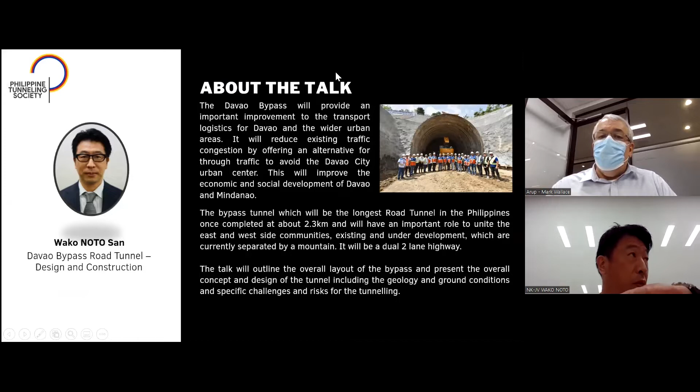Stop sharing. You share your screen. Okay. Is it okay? No, it's fine.

Thank you for your introduction and for giving this occasion to introduce the Davao City Bypass construction project. I would like to introduce the Davao City Bypass construction project.

Project description: Davao City Bypass is one of the projects in the Build Build Build program in the Philippines. It aims for improvement of the transport, logistics, and mitigation of congestion in Davao City urban center, to contribute to the economic and social development of Mindanao.

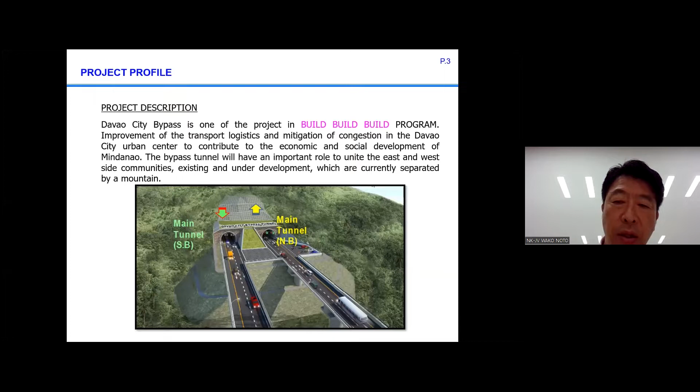The bypass tunnel will have an important role to unite the east and west side communities, existing and under development, which are currently separated by a mountain.

Project objective: hasten interregional transport of goods and services passing through Davao City, reduce transport cost of products to customers, and mitigate congestion in the urban center of Davao City, where average travel speed is less than 20 km per hour. As a result, exhaust gas is also reduced.

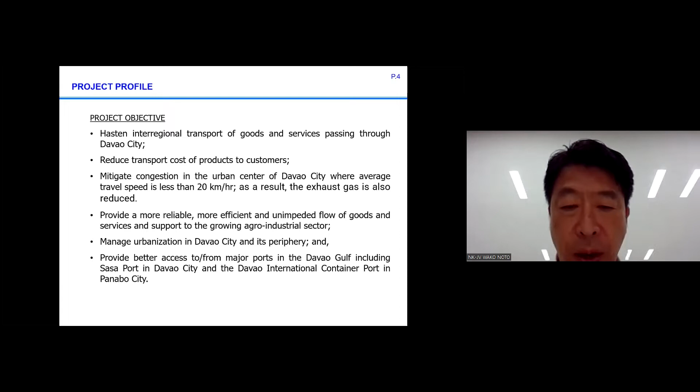Provide a more reliable, more efficient, and unimpeded flow of goods and services, and support the growing agro-industrial sector. Manage urbanization in Davao City and its periphery, and provide better access to major ports in the Davao Gulf, including Sasa Port in Davao City and the Davao International Container Port in Panabo City.

Background: the Japan International Cooperation Agency conducted a preparatory survey of the Southern Mindanao Economic Corridor Improvement, Davao City Bypass Construction Project, in 2013 to 2015.

The project implementing agency is the Department of Public Works and Highways, and the implementation office is Road Management Cluster 1 of the Unified Project Management Office. Consultant services for detailed design and tender assistance have been conducted.

This ran from February 2017 to December 2020. Capacity development of DPWH staff for tunnel operation and maintenance, and tender document preparation for the company of the Davao City Bypass Tunnel, started March 2022.

Construction supervision package 1-1 started 21st December 2020. Additionally, the contractor for construction of package 1-1 is the Shimizu, UBI, and Takenaka joint venture.

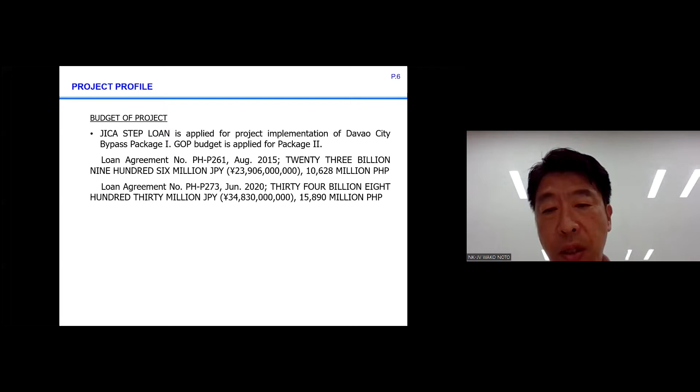This is similar to 10,628 million pesos. Loan agreement number PH-P273, June 2020, for 34,830,000,000 Japanese yen, similar to 15,890 million Philippine pesos. This is the location map of Davao City Bypass.

This is the beginning point, the south point of Maharlika Highway. This is Maharlika Highway, one of the main roads in Davao.

This blue color is the package 1 section. The red color route is the package 2 section. This is Sasa Port, and this is Samal Island near Davao. This is Davao Airport. The end point is almost the borderline of Davao City and Panabo City.

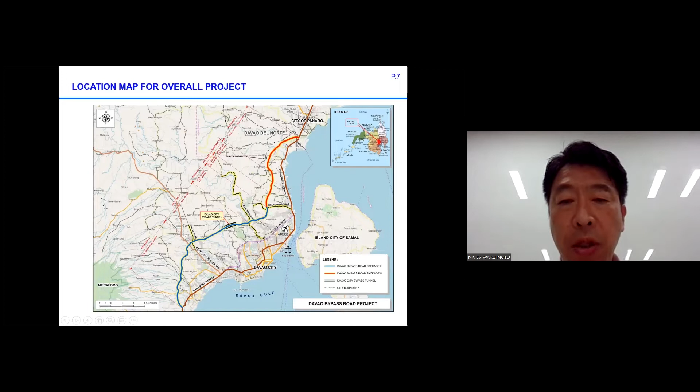This is Maharlika Highway. Blue route is Davao Bypass. So Davao Bypass is bypass for Maharlika Highway.

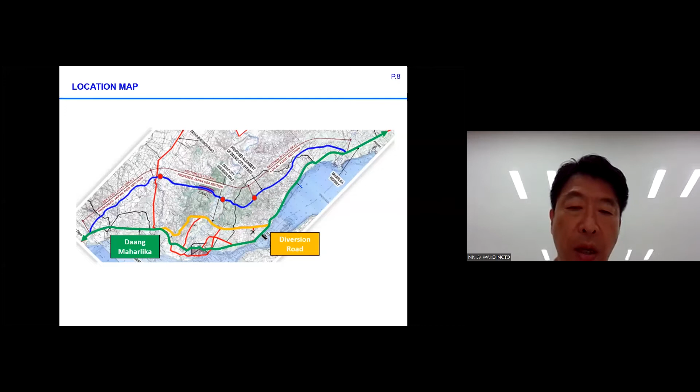This diversion road, now mainly using diversion road as Maharlika Highway. This is Davao Bukidnon Road. This road is north-south road, north-south regional road in Davao.

This section is package 1-1. This section is under construction. Length is 10.7 kilometers.

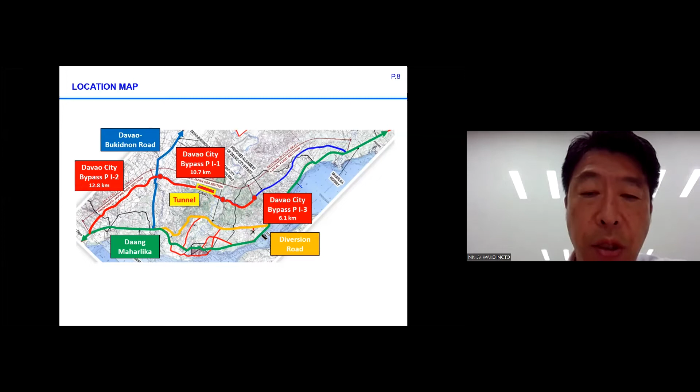This is the tunnel section. This is package 1-2, length is 12.8 kilometers. Now we are conducting the procurement for contractor. Also, package 1-3 length is 6.1 kilometers. This package also under procurement, under bidding. This is package 2, length is 15.6 kilometers.

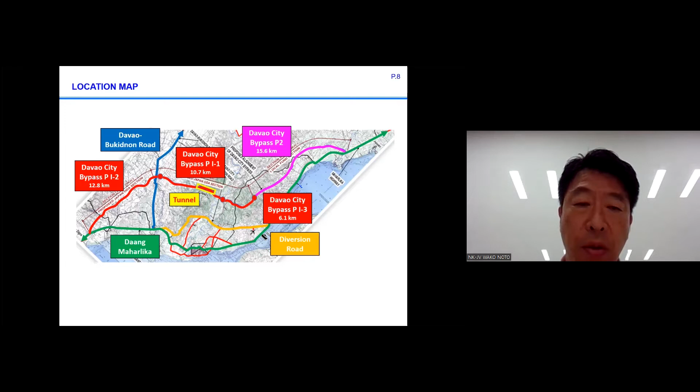So the tunnel is included in package 1-1, length is about 2.3 kilometers. And this tunnel will be the longest road tunnel in the Philippines now.

So package 1-1 total length is 10.7 kilometers. 7.9 kilometer is the road section, 0.5 kilometer is the bridge section, 2.3 kilometer is the tunnel section.

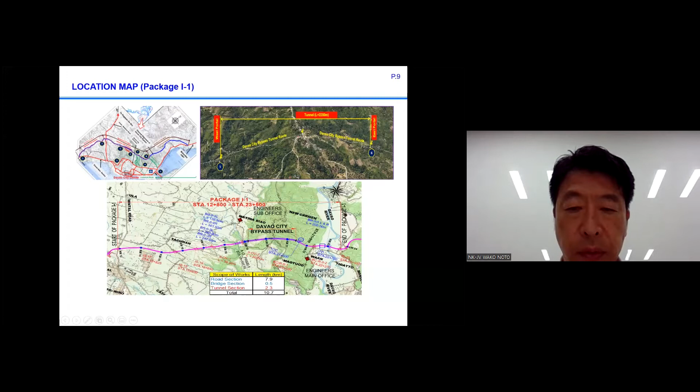This is the tunnel section. And this is the west. Now we are calling this the south portal. This is the north portal. This is the project road.

This is the topographical and geological condition. This project road is located at the rolling to mountainous terrain, except some limited flat section. It passes under a hill of 210 meters height by a tunnel of 2,280 meters long.

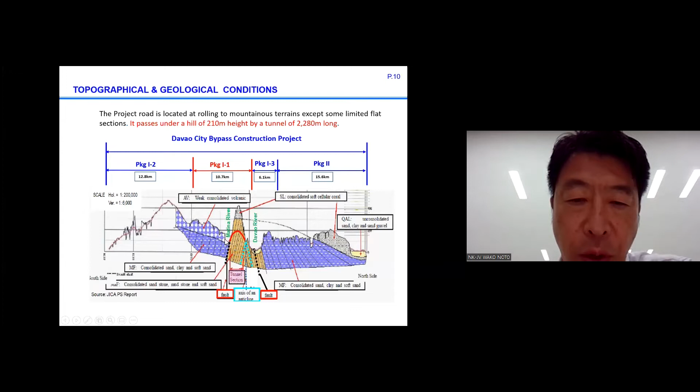This section is package 1-1. This is the tunnel section. This is the mountainous terrain. On the south side of the tunnel, there is Matina River. On the north side of the tunnel, there is Davao River. The geology of the tunnel section is almost consolidated sandstone or mudstone and soft sand.

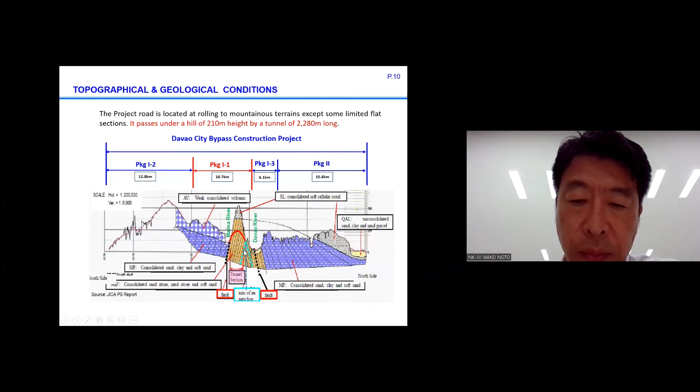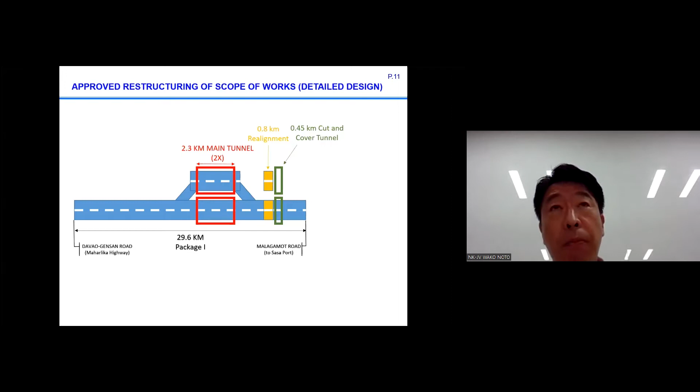This is the approved restructuring of scope of works. At the feasibility study stage, Davao City bypass was planned for two-way traffic. Then we proposed, before detailed design, that only the tunnel section shall be constructed, two tunnels. It means only the tunnel section changed to 4 lanes.

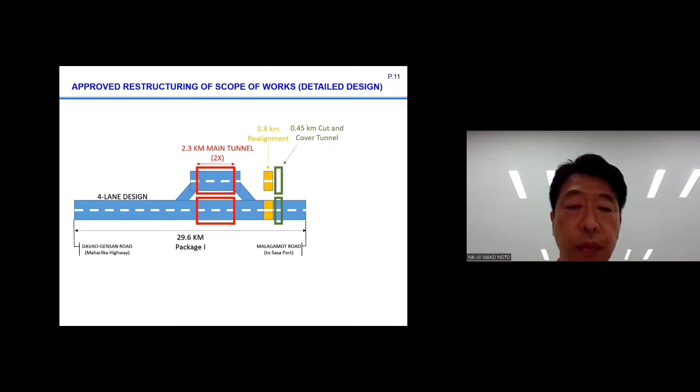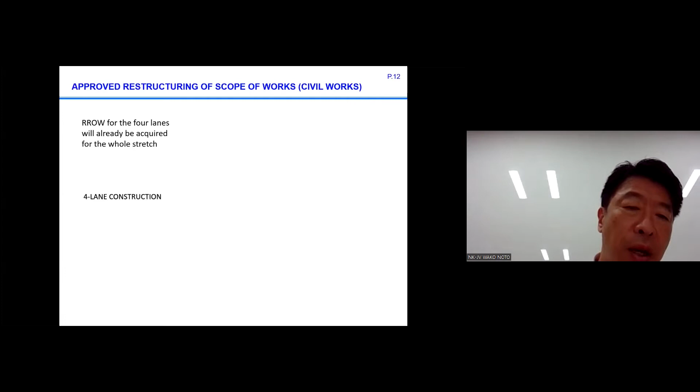So during the detailed design stage, ROW for the 4 lanes will already be acquired for the whole stretch. So DPWH decided on 4 lane construction for the whole Davao City bypass section.

Total length is 45.2 kilometers, including the 2.3 kilometer main tunnel and about 0.4 kilometer cut and cover tunnel in package 1-3.

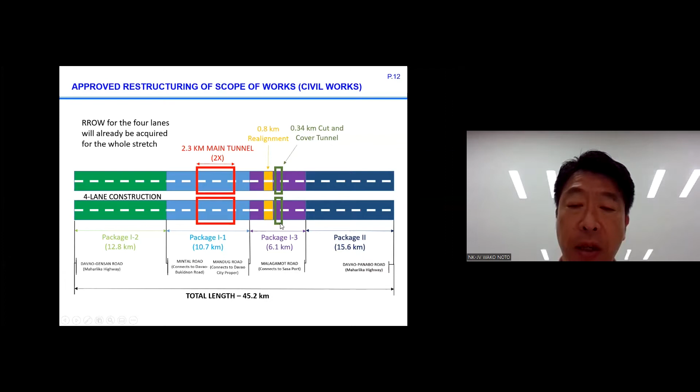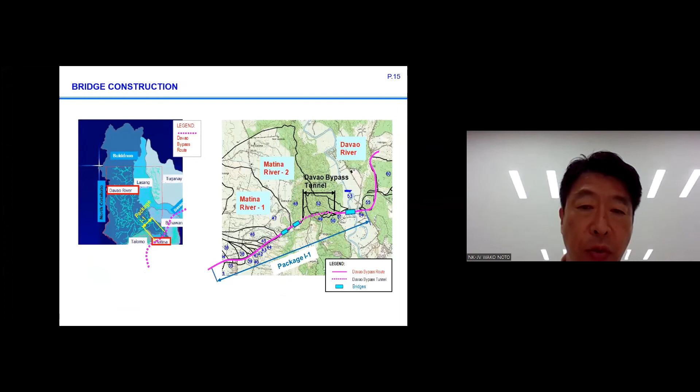This is the explanation of the road and bridge. I will skip this.

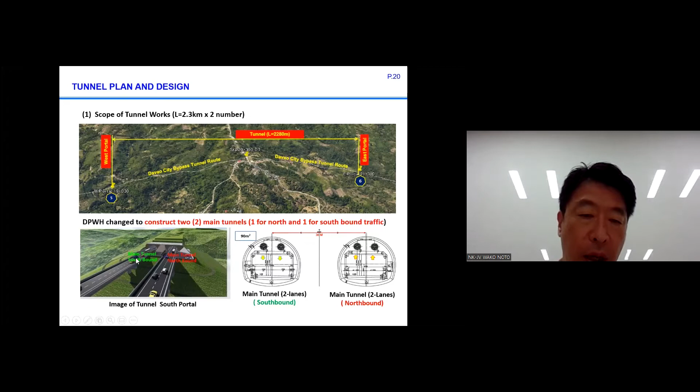This is the tunnel plan. This is the tunnel typical section. The excavated area is about 90 square meters. The distance between tunnel centers is about 30 meters, southbound and northbound. This is the image of the tunnel portal.

As the tunnel construction method, we apply NATM, New Austrian Tunneling Method. As I explained, the geology here is mudstone or claystone, something like that. So we can apply mechanical excavation, no need for explosion.

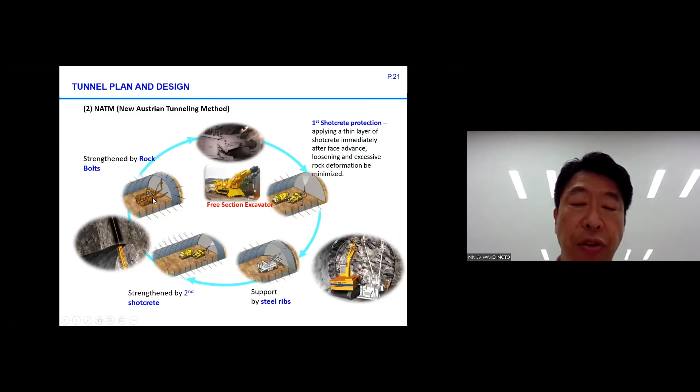So after excavation, as the construction procedure: excavation by excavator, then first shotcrete protection, then steel support by steel rib, then second shotcrete, and rock bolt. This is the general procedure of NATM.

In the case of the Davao bypass project, as I explained, the geology is not hard rock. So we apply geological classes D1, D2, and D3.

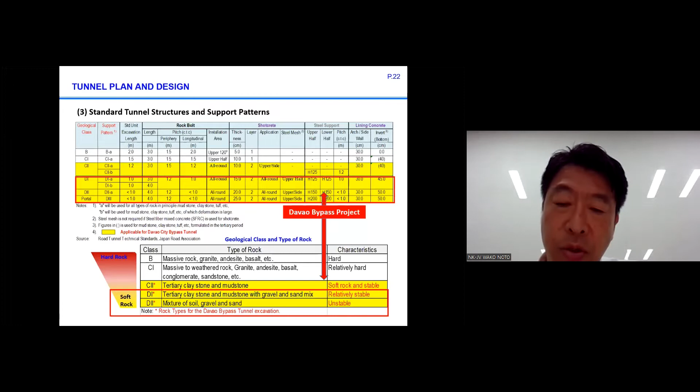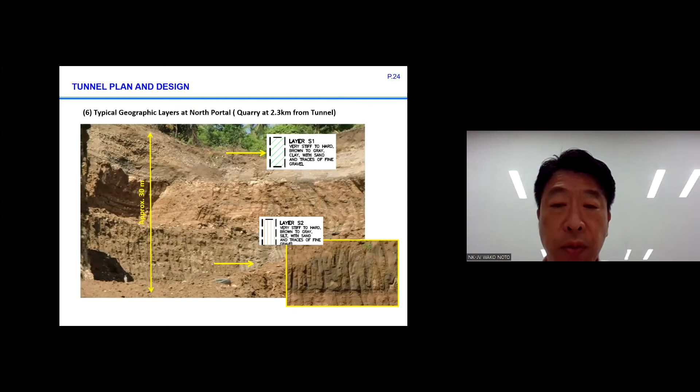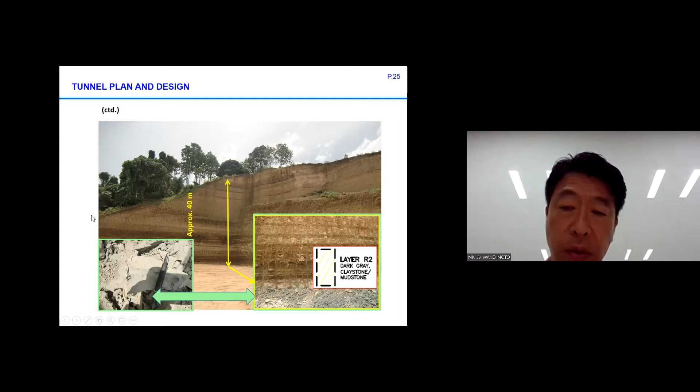So in the portal section, in the design of the portal section, we apply AGF. AGF means All Ground Fastening, used as an auxiliary method. Steel pipes will be installed from the tunnel face of the portal, with a length of 12.5 meters, along with injection. So protection is prepared like that.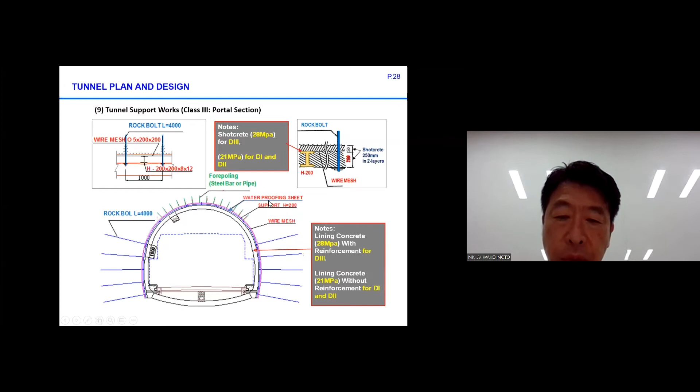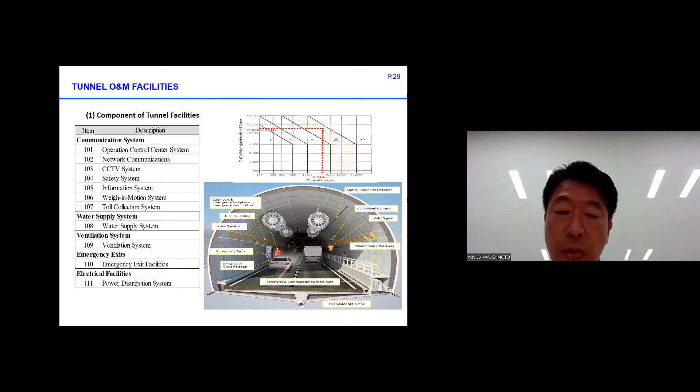Because tunnel facility shall be maintained after the opening of the road, budget is needed for maintenance of tunnel facility. That's why the Davao City bypass tunnel will become a toll road.

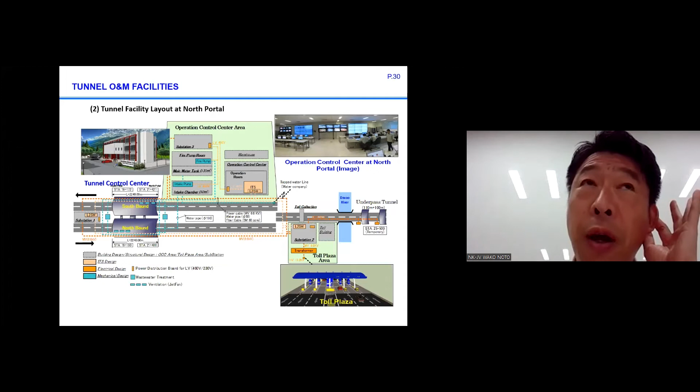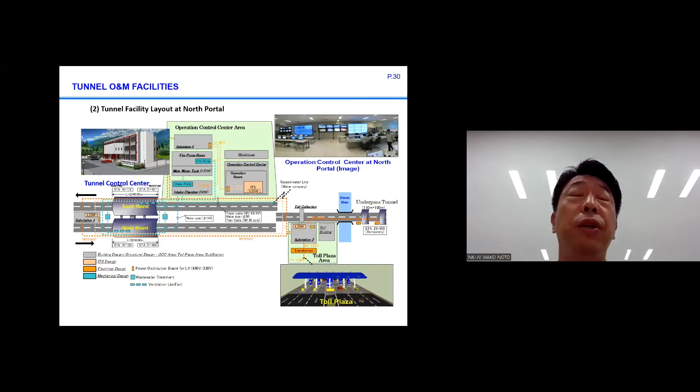I should explain: Davao bypass is the bypass of Maharlika Highway, but Maharlika Highway is national road number 26. It means Davao bypass is the bypass of a national road, not an expressway, but will become a toll road.

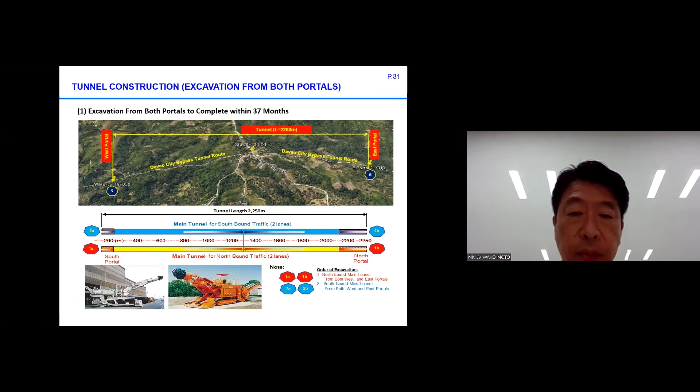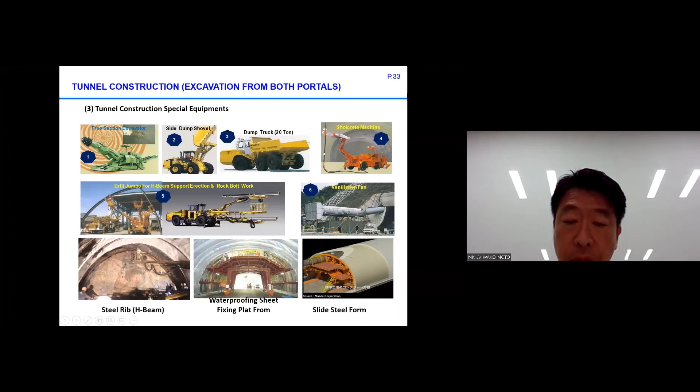In case of Japan, we are applying H-beam as steel rib. This is the waterproofing sheet fixing platform, and this is the slide steel form.

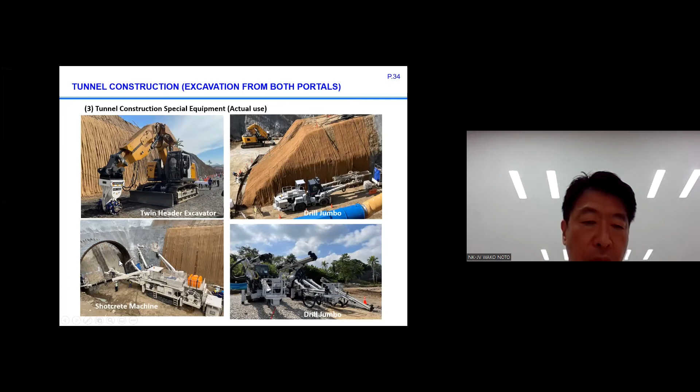This is the twin header excavator for tunnel excavation. This is the drill jumbo, and this photo is also of the drill jumbo. This is the shotcrete machine. And this photo is just the start of excavation from the portal.

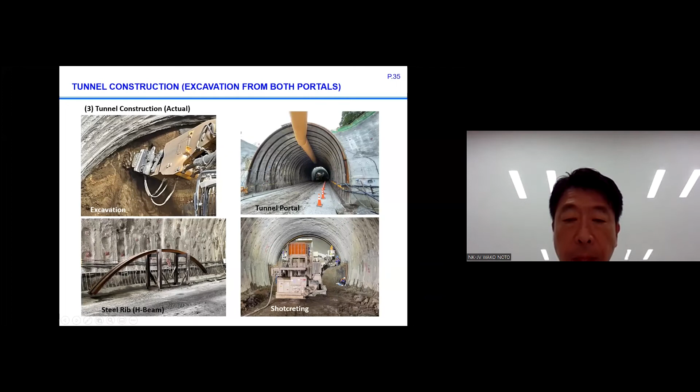Now, the tunnel excavation progress: from south portal, northbound is 49.7 meters, southbound is 37.4 meters.

Sorry, I couldn't mention the north portal. The length from north portal, northbound is 168.7 meters, southbound is 202.7 meters. This is the progress of excavation.

This is the photo of the excavation tunnel face. This geology is almost mudstone or claystone. If this geology is almost stable, then we are assuming the basic geology in the Davao bypass tunnel is like that.

But near the portal section it is conglomerate or soil condition, so it is very easy to collapse.

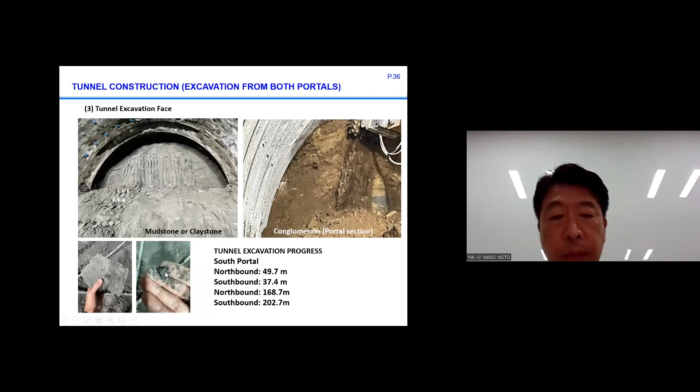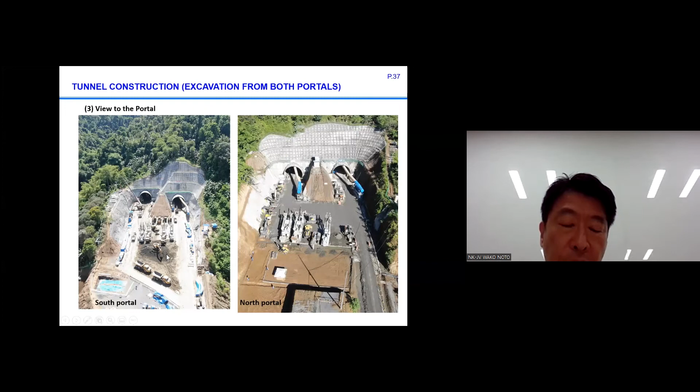This is a photo taken by drone from over the portal. This is the photo of the south portal, current situation. This is a photo of the north portal.

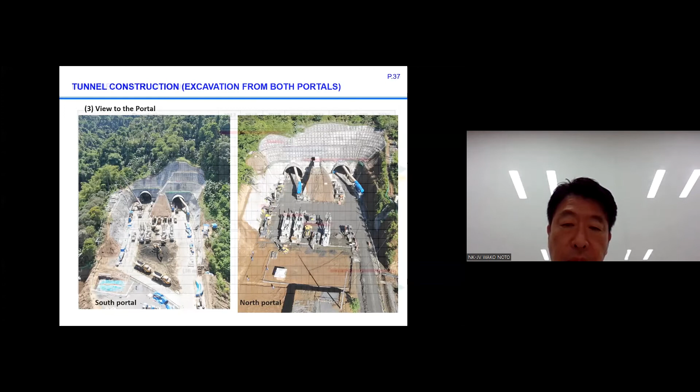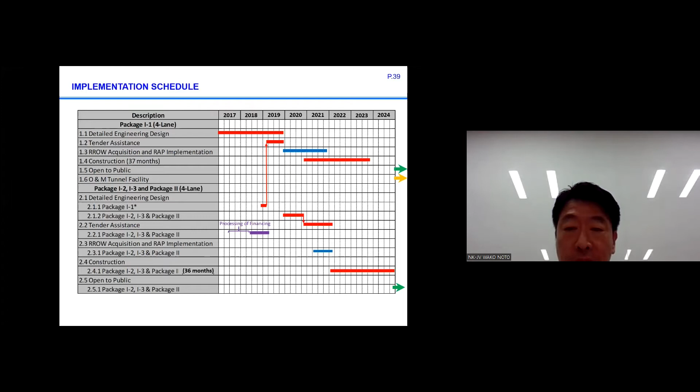That's all. Thank you very much.